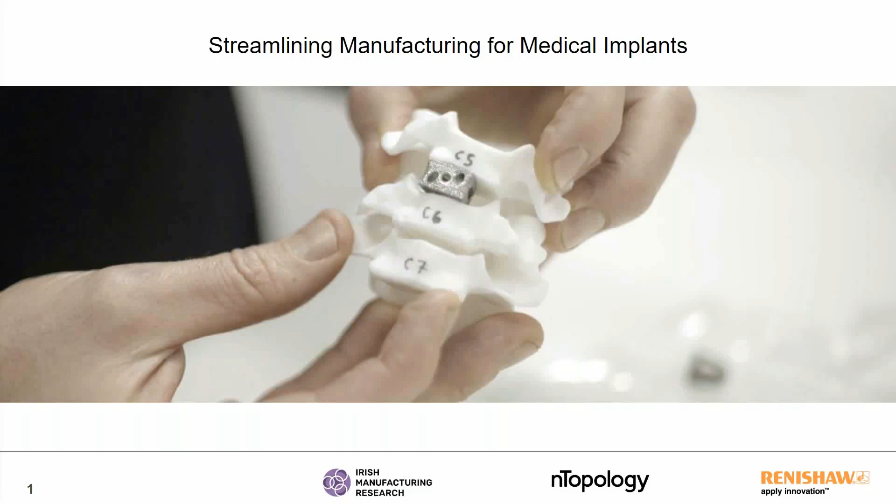We're very excited to be showcasing this case study, this joint venture between IMR, Renishaw, and nTopology. My name is John Graham. I manage the team of application engineers at nTopology, and I've got the pleasure of introducing everyone here to you today. And this is the order in which we're going to be going.

So I'm going to turn things over to Mark Hartnett in just a moment at Irish Manufacturing Research. Our very own Chris Cho at nTopology is going to walk through how this medical device was designed and some of the breakthrough technologies in nTopology. And then finally, Chris Demery at Renishaw will give you an overview of some of the printing capabilities and how they turn this design into a reality.

Now, one thing to mention before I turn this over to Mark is that this is really a technology demonstrator that we're showing you today. Most of you, if not all of you, understand additive manufacturing is really changing the landscape of how things are not just manufactured, but the approach to design.

A lot of breakthrough technologies are coming out on the scene, and all three of our companies are at the forefront of exploring how can we take something like additive and push the bounds, not just in the way things are manufactured, but the way we think about design and where these designs can be used, even something as wild as in the human body. So that's what we're talking about today.

So this actual design hasn't been put in a body quite yet, but this is really a demonstrator of the capabilities that I believe are soon going to be coming down the road, and some of them may have already been there. So I want to turn things over to Mark Hartnett now of Irish Manufacturing Research, and he'll walk through what this design was all about and what led them to try to push the bounds and use something like additive manufacturing. Mark, go ahead and take it away.

So what additive allows us to do, we have the same ideal design that exists there, but by using new tools, the advanced skill sets, and retraining our designers, we're able to design and develop a product that's much closer to that of the ideal design.

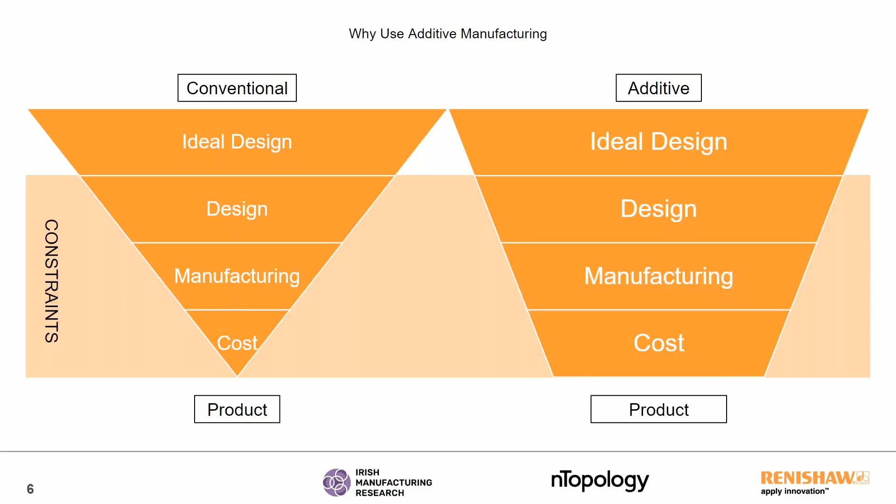The manufacturing limitations that are placed on that by additive manufacturing are much less than those that exist from a traditional manufacturing process. And finally, the cost limitations that come with additive manufacturing are much less constraining. You're able to do a lot more with your process for the same cost compared to a traditional manufacturing process. And this is where that adage of complexity is free comes from.

So when we're designing our product, our first goal is to produce our design envelope. And we need to do that for both the process and for our product. So if we look at our process design, we start with a key user requirement. We get that through our voice of customer analysis. So the first one is obviously the product has to be designed well for the process which is producing it. So we come up with a number of design solutions which allow us to hit this.

So if we take, for example, minimizing the post-processing requirements, there are a number of ways that we can minimize the amount of post-processing we need to do to a product. If we understand what the effect of self-supporting geometry is, the effect of the overhang angle on surface finish, and how we can get away with producing a part without any support geometry, we can produce a much better component with a lot less additional work at the end.

So if you take, for example, by producing it with a bullet nose tip, we're able to build it straight onto the build plate, allowing us to produce a part with no support removal.

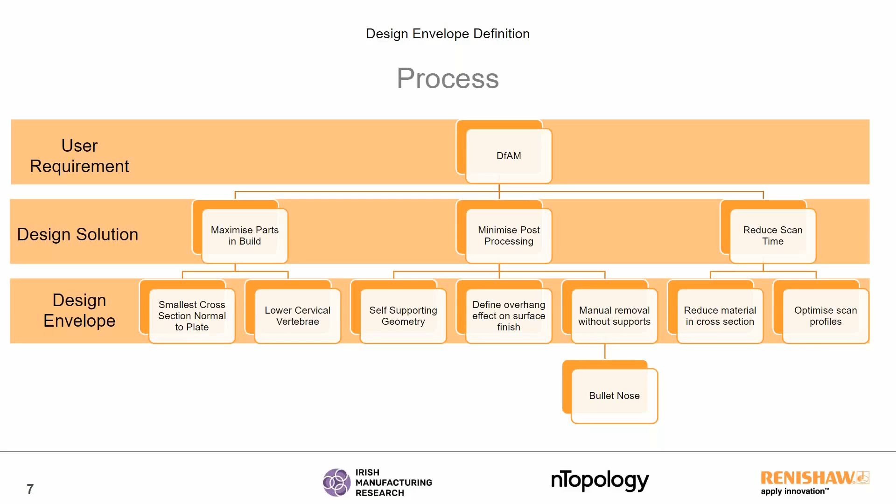So then we start to come to our product envelope. And this is where it begins to get really interesting, because our key user requirements are what are going to affect the customer at the end of the day, not what's going to affect us internally. So if we take, for example, improving subsidence management. Subsidence is when the implant itself moves into the bone, gets reabsorbed into the body, and actually starts to present the same and worse symptoms that you're trying to treat in the first place.

So we can improve that through a few ways. We can reduce the stiffness of the device, and we can do that by applying porous structures or other compliant features into the bone. And one of our goals there can be to match the stiffness of the bone which we're going to be in contact with. And we come up with a methodology for measuring whether or not we match that stiffness. So we look at test methods such as ISO 13314 or other ASTM standards, which are very similar as well.

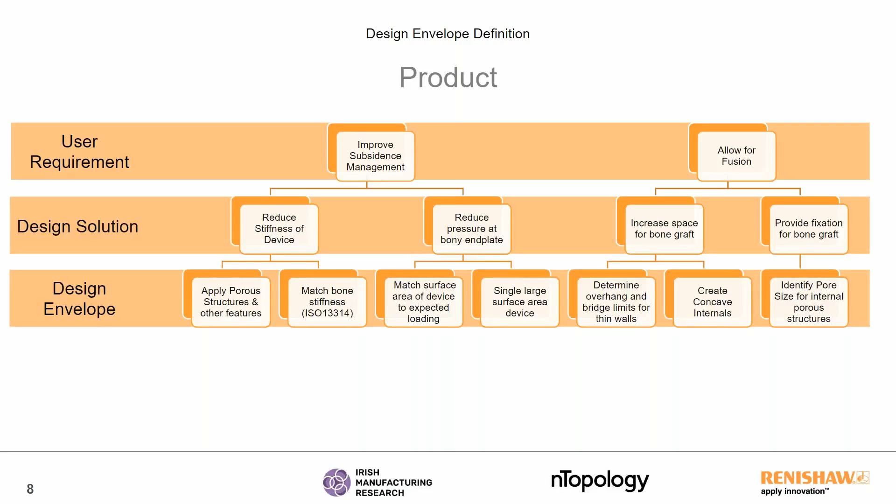Over to the other side, obviously the classic one that everyone hears about is improving osseointegration from porous structures. So we can look at providing good fixation for a bone graft, and we need to do that by identifying the correct pore size that's needed for the internal porous structures. And what's interesting about this is once we start to do this, we start to move into requiring very fine strut sizes, which requires us to refine our laser parameters, which shows that close link between our product development cycle and our process development and our process optimization.

So once we have our design envelopes defined, we can start to actually get into the fun of developing the product which meets those. So you can see here that we've got multiple geometries for our porous structures. And what we're trying to do with these is with two key requirements. One is to control the mechanical compliance, which is defined by the equations you see in the middle, relating the density of the porous structure to the mechanical properties. And the other is to specify the specific pore size to optimize for osseointegration.

And what this allows us to do, once we're able to define our key requirements in a mathematical form, we start creating this link between the required product performance and the physical shape of our final product. We can feed these equations into parametric softwares and really speed up that iterative design process. And you can see here some of the key cell geometries that we've gone forward with for our development.

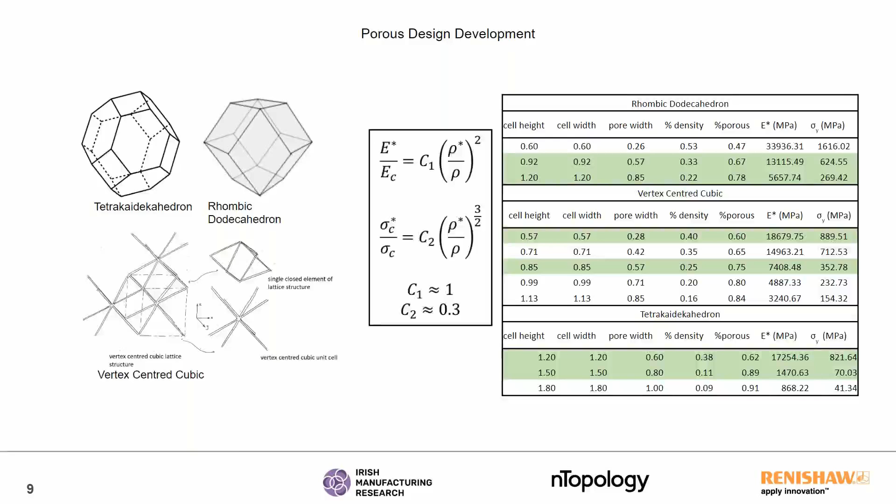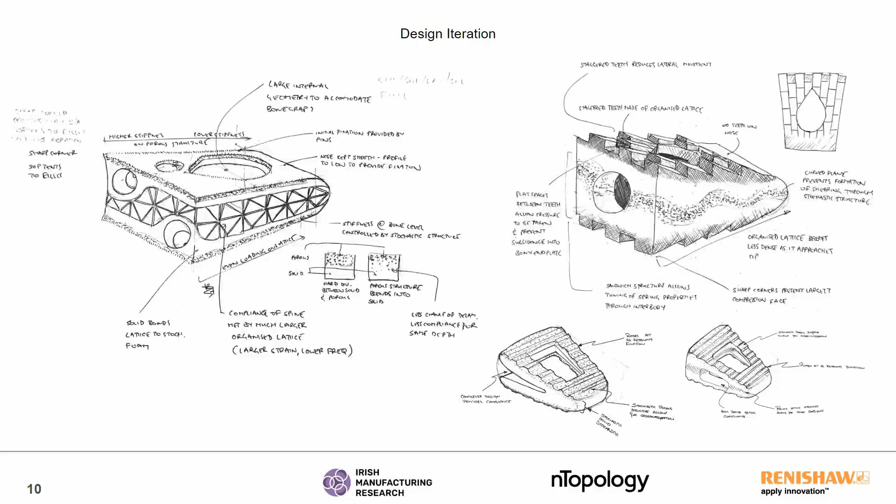When we look at the lattice structures, we have two main functions of the lattice structure. We've got features on the top and the bottom surface of the part, and these are to promote osseointegration. We want to get that bone to grow into us as quickly as possible, and we've specified the optimal pore size for that, between 0.2 for wicking of osteoblasts and 0.9 for full bone ingrowth.

And then finally in the middle, we've got a mechanism for allowing compliance, be that through a large-scale feature or the lattice structure. And an important one here is we want to use a stochastic structure, a random structure in the middle, to minimize any potential shear planes which could exist throughout the entire structure. Next slide, please.

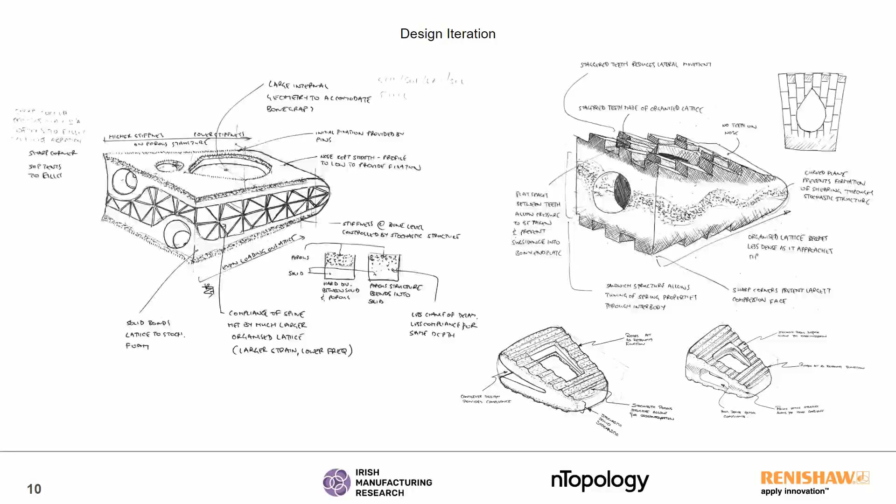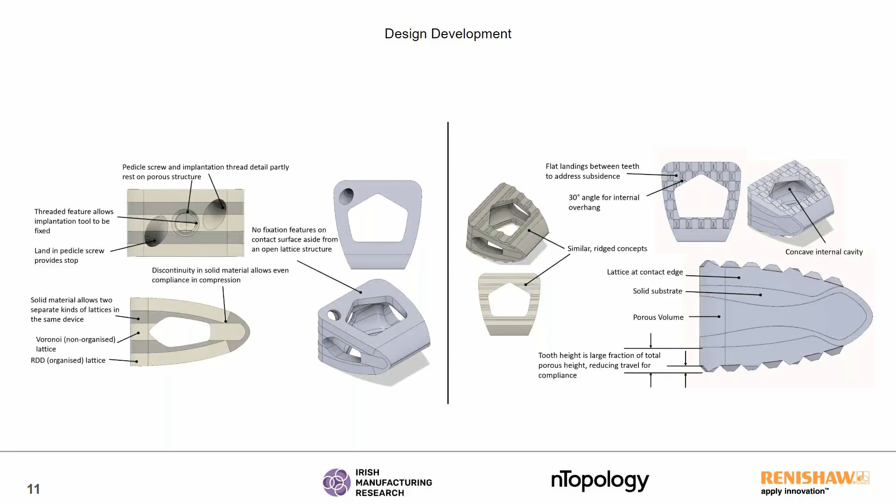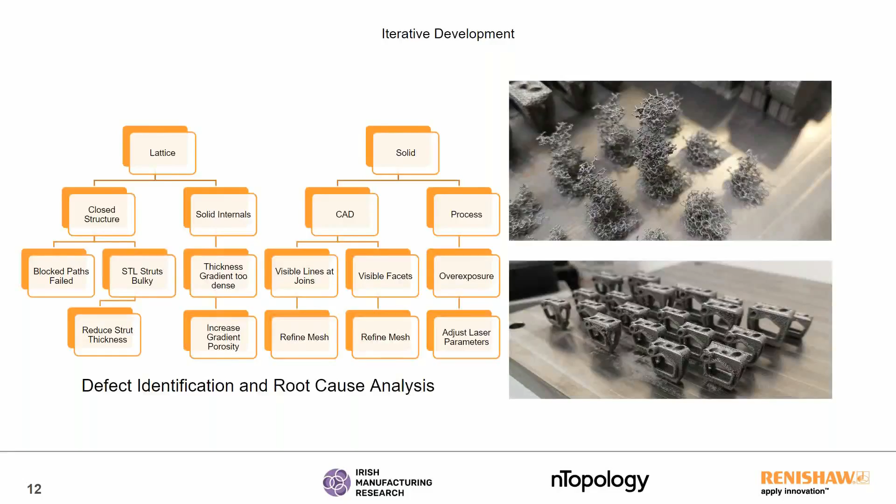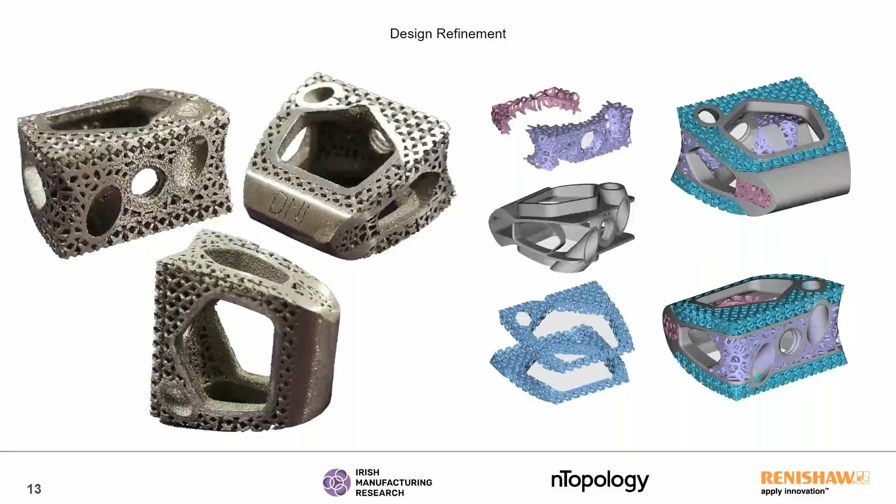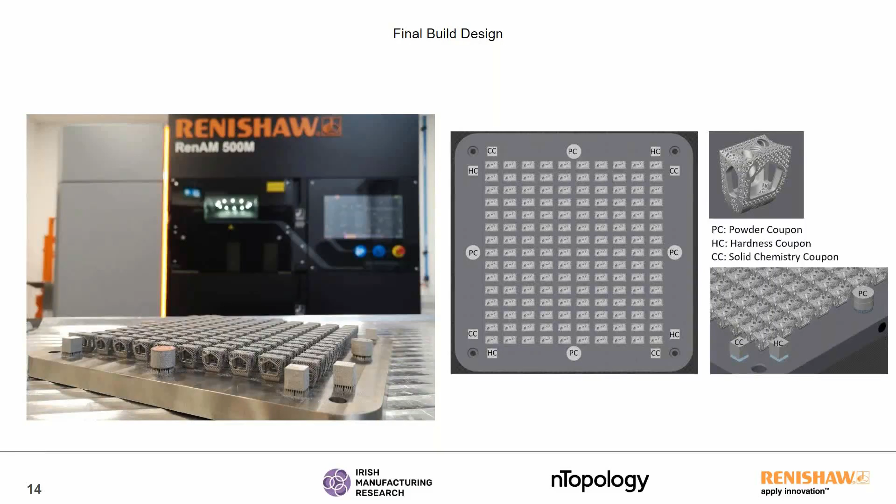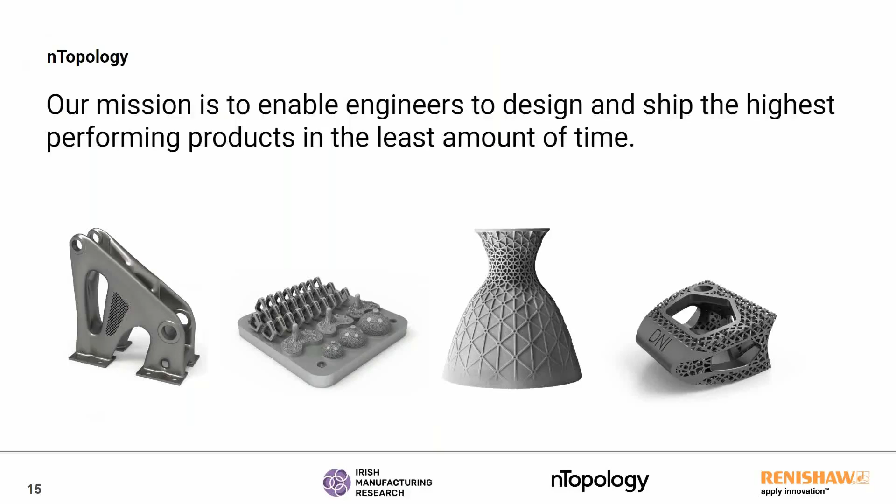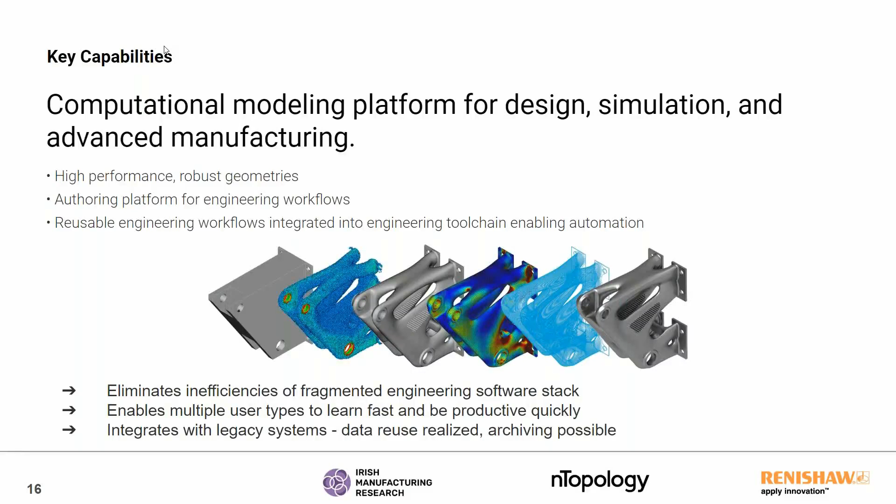Thanks, Mark. nTopology's mission is to enable engineers to design and ship high-performing parts in as little time as possible. With the computational modeling platform that is the nTop Platform software, users are able to leverage its capabilities for design, simulation, and advanced manufacturing. Through the use of robust and reusable workflows, engineers can enable advanced and high-performance geometries in an approach that unifies design, simulation, and manufacturing together. By integrating these workflows into their engineering toolchain, users will find that they can automate processes, eliminate software inefficiencies, and be more productive, while still maintaining integration with their legacy systems.

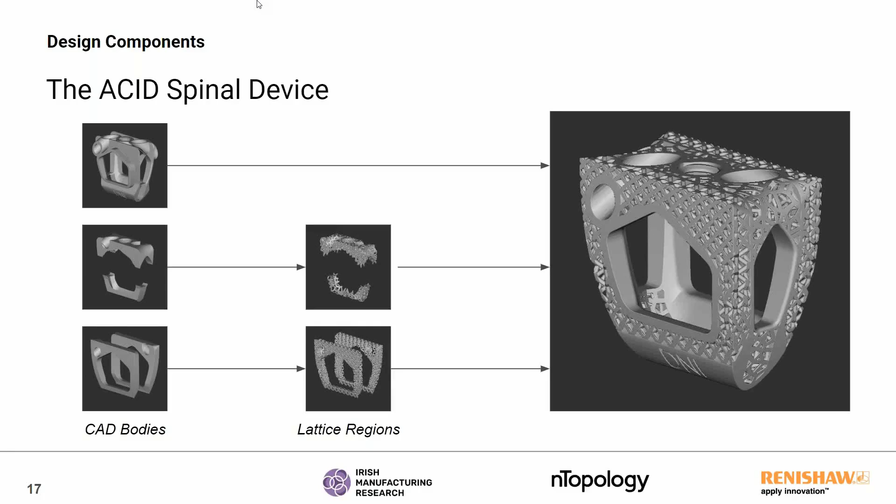The design approach of the ACID spinal device is very much a volume-based approach. Now, using the solid bodies provided in their 3D model, the designers over at IMR were able to assign certain bodies as solid regions and others as design regions to be populated with a lattice. By recognizing the regions as separate entities, the designers can be sure that they are working exclusively within their net shape and combining them at a later time only when they are ready to do so.

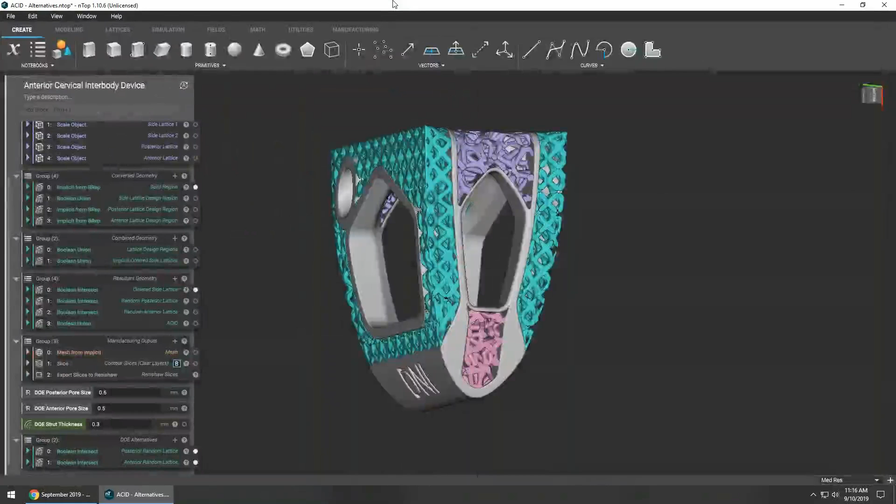One of the benefits of using the nTop Platform software is the ability to quickly and effectively sweep through parameter sets just to see how the geometry will respond to these inputs. From there, the designer is empowered with real-time feedback to make the best engineering decisions. To showcase some of this feedback, I can jump into the software and sweep through a few values for the pore size of these randomized lattices. In only a few seconds, I'm able to immediately assess what those inputs will yield and continue in the right direction from there.

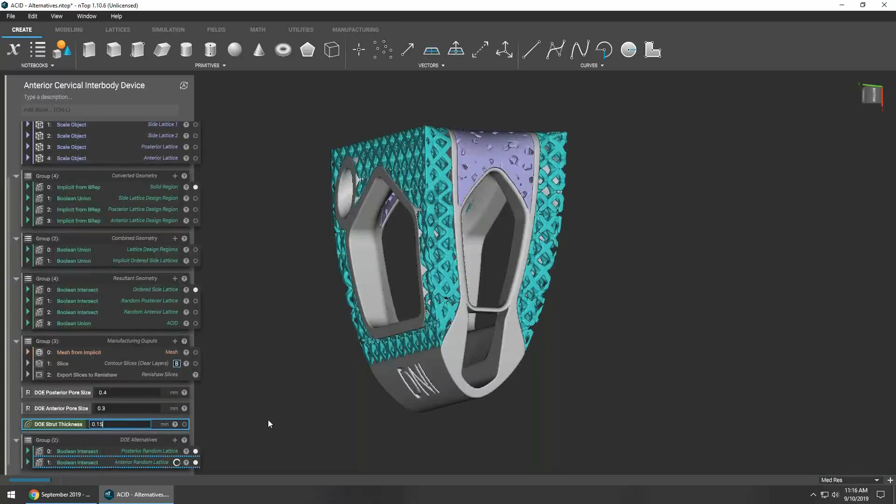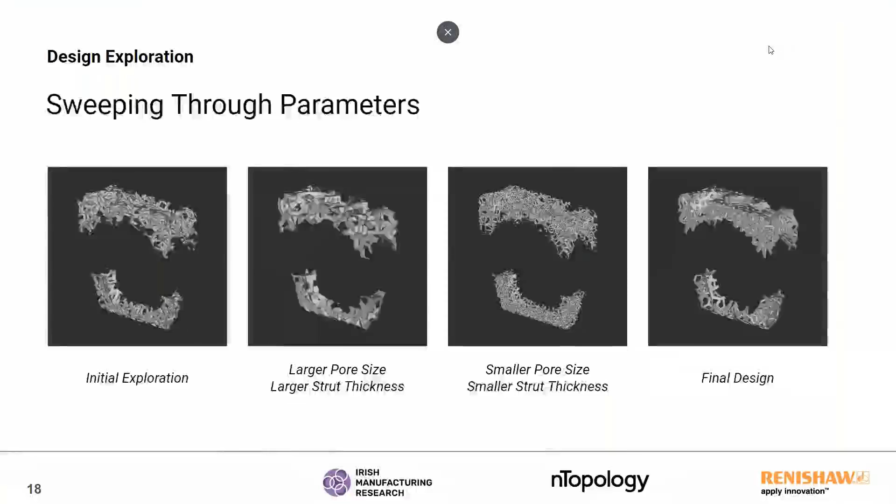A key value of nTop Platform is also being able to easily reuse these workflows regardless of any changes in geometry. In the case of the ACID spinal implant, even if the input geometry set is slightly wider or slightly longer, the workflows are robust enough to compensate for these variations and continue to execute as intended.

This alone has significant implications for spinal devices, which can have part families ranging from 20 parts to over 100. Being able to design a single robust workflow and reusing it over and over again has the potential of eliminating an exorbitant amount of repeated work when compared to a design process that needs to be tailored to each and every single implant.

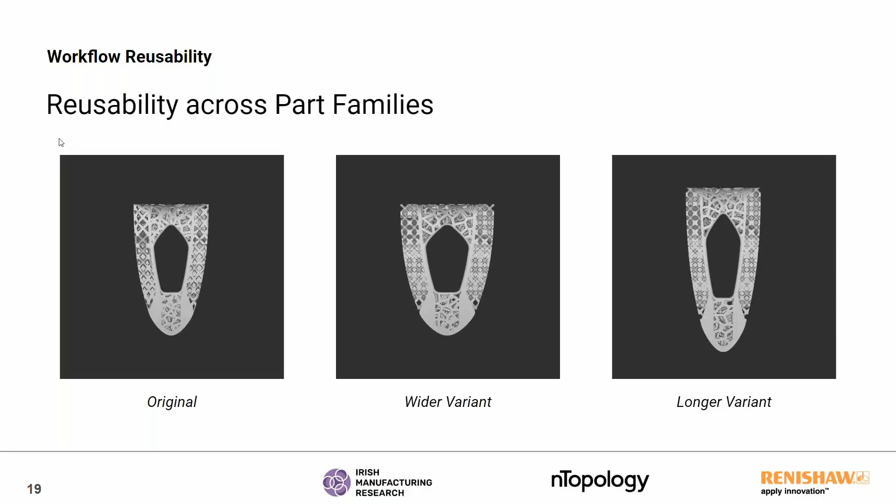What is also recognizably important to these design workflows is their repeatability and controllability. Any workflow that is created in the nTop Platform software is not only PLM compatible, but also highly shareable. During the development of these workflows, only the variables that are relevant to the design exploration are modifiable.

The rest of the knobs and dials that can introduce variability into that workflow are locked away so that mistakes can't be made and the risk is greatly reduced. This enables a single workflow to perpetuate within a team or far within an organization while still adhering to the initial design intent.

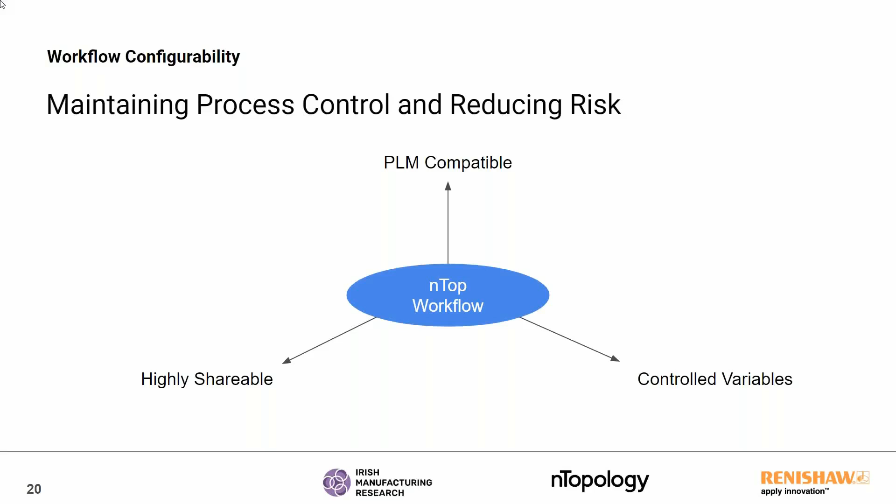Finally, nTop Platform allows your geometry to leave the screen and become a physical product through one of two ways. The first is your classic mesh output, such as an STL format. These files are universally recognized, but can be a bit heavy when it comes to the file size, especially for lattice-based designs. However, we can take things a step further and bypass these heavy STL files by slicing the part

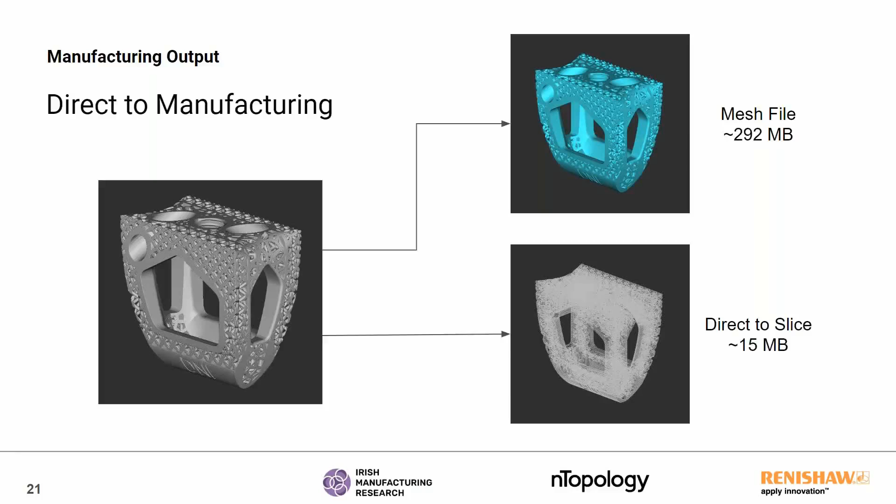directly within nTop Platform. By working directly with Renishaw, we've ensured that the contours and slices that we generate in the software can be directly read by Renishaw software, eliminating the pain points that come along with working through these traditional meshes. Now, I'd like to introduce Chris Timmery from Renishaw to discuss the hardware involved in making the ACID device possible.

Thank you, Chris. So this is Chris Timmery from Renishaw Medical Dental Division. I'd like to give you an overview in terms of the features that are available on the Renishaw platforms and how they're relating to what Mark's doing at the IMR in terms of development for medical devices. Some of these features are going to span across R&D, also production of the devices. So if we could go to the first slide, please, Chris.

Right, so Renishaw is producing our own software packages. So we've got a material editor. When Mark had touched upon the design of experiments that he was carrying out, he was very interested in having an open software source that was able to give him flexibility in terms of developing his devices and not constraining him at all. So Renishaw provides that solution here.

There's up to 170 configurable process parameters, and also one key thing is the laser is able to be used in continuous or modulated waves. What that delivers to you is the ability to actually melt metal at a very quick rate for, say, the very dense areas of the geometry, and then also use the modulated wave when you're looking at the fine lattice. So again, you've got complete open, flexible development parameters. If you go to the next slide, please, Chris.

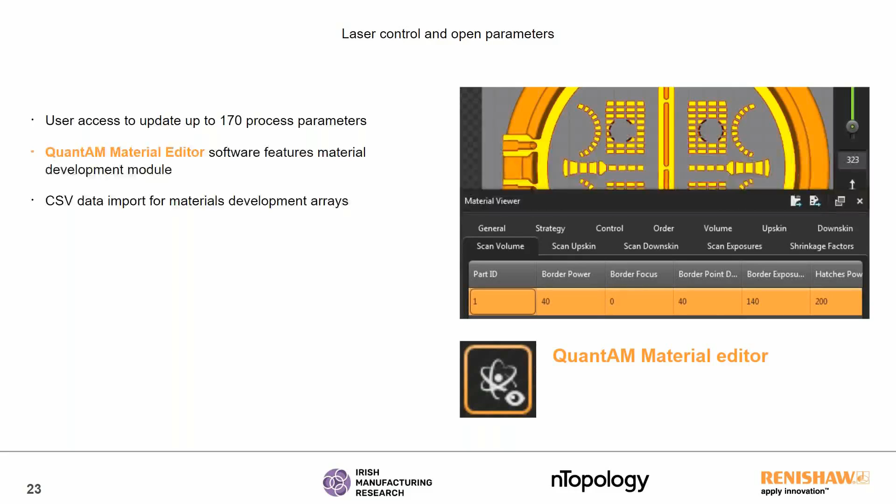The QuantAM build preparation software, again, developed in-house, so future developments, which is really important in this sector at the moment because everything's moving so quickly, are going to be delivered through to you as a user. Very easy to use, and again, gives you that wide flexibility. If you go to the next slide, please, Chris.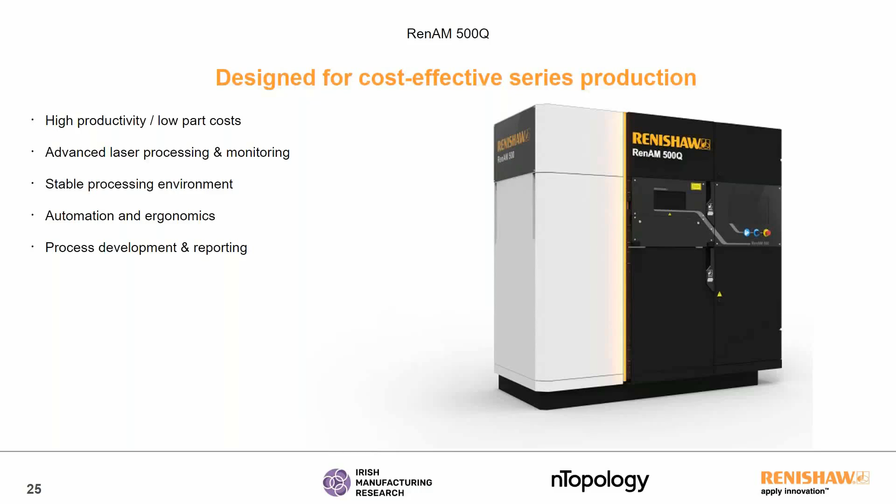So when I touch upon the technical advancements, within Renishaw, we've designed our own galvo mounting system for the lasers. So that's actually the image that you can see there on the screen in front of you, and that gives us great control over the lasers themselves. And the key point which links in with the productivity and the operational side is that it allows you to get the 4 lasers output level in the footprint of a single laser machine. If you go to the next slide, Chris.

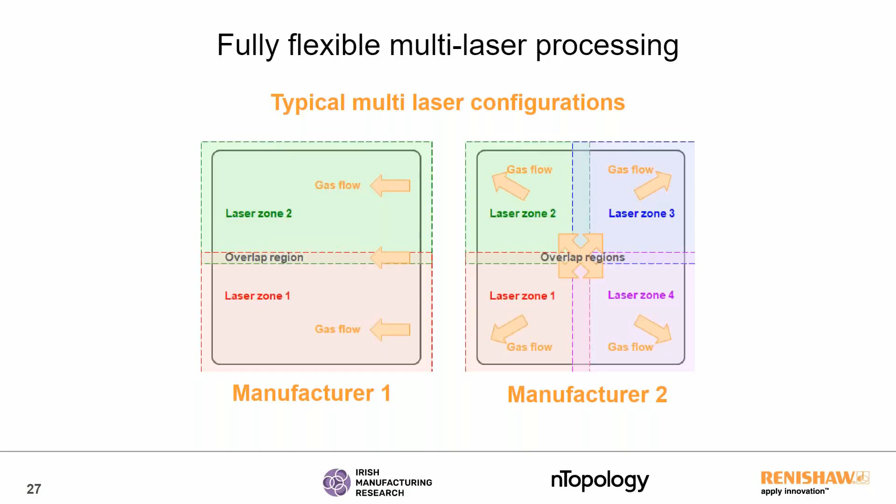The Renishaw system has the ability for each laser to go to the full extremities of the plate. So you again have open control and flexibility to program the lasers to fire at any part with any parameters you choose within your device and manufacturing process. So that eliminates the overlap regions. That again gives you more flexibility, and potentially with some devices would mean that you can produce quicker.

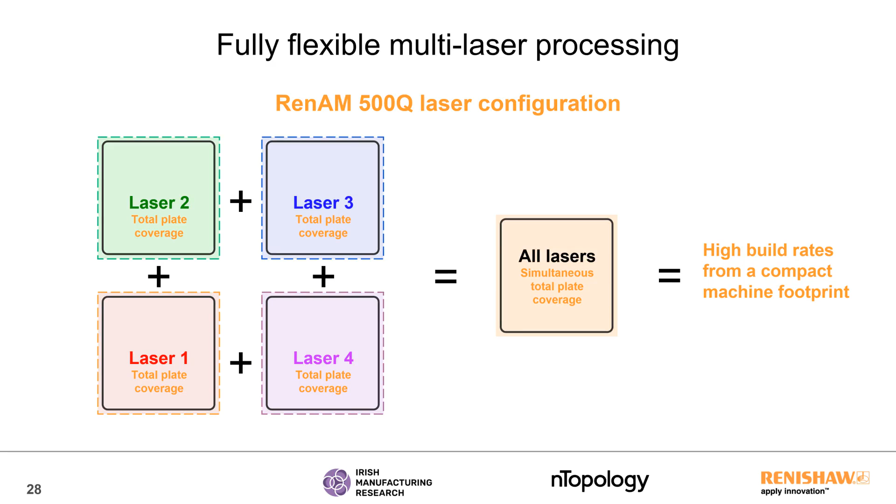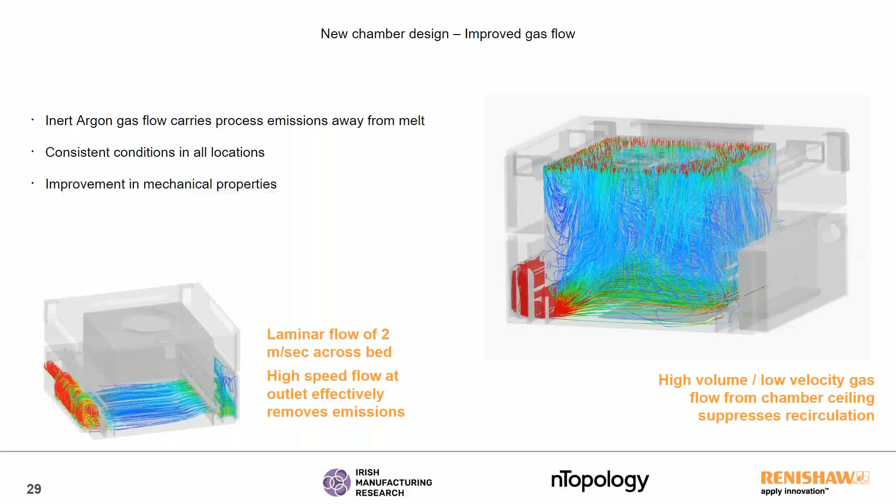So that's everything from me. I'm going to pass back to John now.